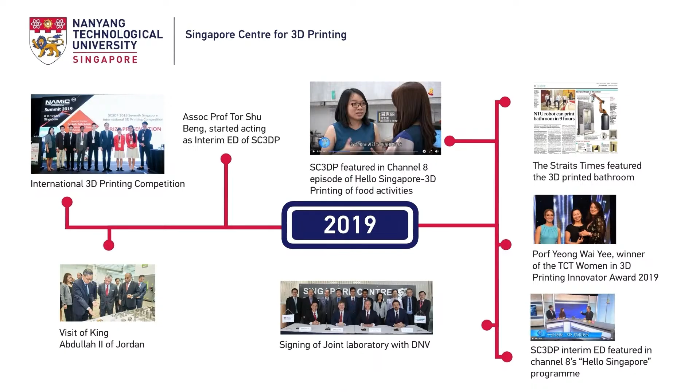...future of stakeholders to identify optimization opportunities and make informed decisions that prioritize sustainability and resource efficiency. From design for 3D printing to material development, new process development.

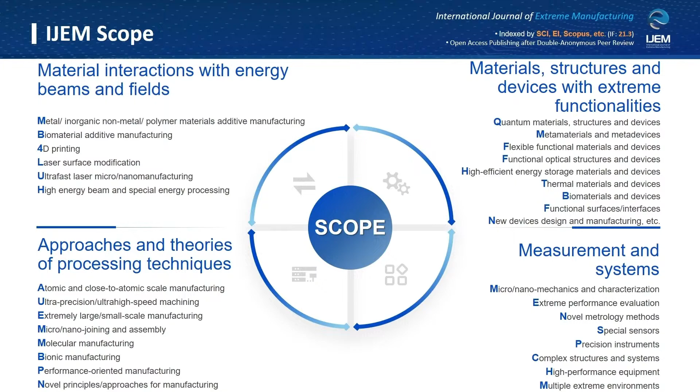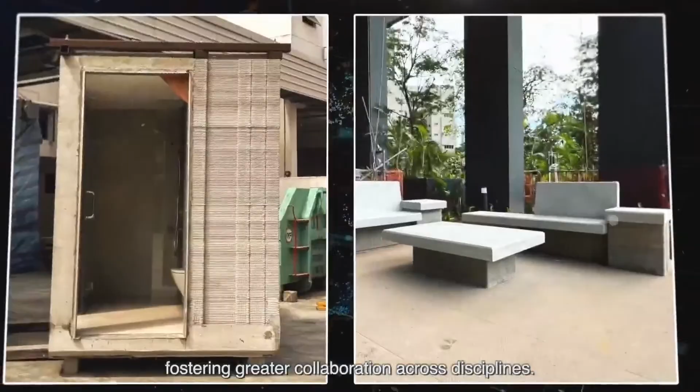Enhance precision, reduce timelines, enable complex design, fostering a greater collaboration across disciplines. And I'm very happy to moderate this first session focusing on multi-material additive manufacturing. And we have a line of fantastic speakers from United States, Australia, and China. And it's a great pleasure to introduce the first speaker, Professor Banerjee.

Professor Banerjee is a University Presidential Professor and Regents Professor in the Department of Materials Science and Engineering at University of North Texas in the United States. He holds several appointments as adjunct and visiting professor in Materials Science and Engineering at the Ohio State University, Nanyang Technological University in Singapore, Indian Institute of Technology, Bombay, and Monash University.

Professor Banerjee has over 350 publications in peer-reviewed journals and total citations exceeding 25,000. And today he's giving a talk entitled Additive Manufacturing of Compositionally and Functionally Graded Metallic Materials. Professor Banerjee.

Thank you very much, Paulo. So I'll start sharing my screen here. Okay, and go into the slideshow mode. I think everybody can see my screen, right? Yep. All right. Yeah, so thank you for the kind invitation, Paulo and you.

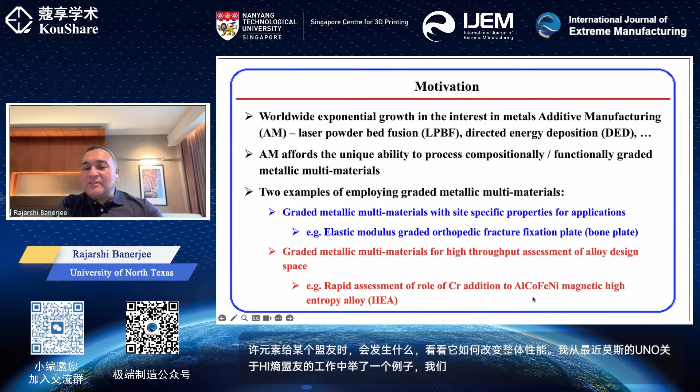And I've taken an example from more recent work on high entropy alloys that we do a lot of work on using additive manufacturing too. And this is a magnetic high entropy alloy, aluminum, cobalt, iron, and nickel, and the effect of chromium additions to it. So with that, let me just delve into these two topics.

So DED, I think most of you have heard of it. It's a blown powder process or directed energy deposition. We are not basically melting a bed of powders with a laser beam, but we are directly feeding the powders through a directed assembly system. So it goes through these powder hoppers. The powder hoppers deliver it through nozzles, as you can see here, and then the nozzles deliver the powders to the location where the laser beam is hitting a substrate. So you are effectively melting the powders that are kind of blown into the localized melt pool on the substrate.

And then you raster, you could have multiple systems. So the simplest one is rastering in the XY direction the substrate and the laser head along the Z axis. And that way you can build layer by layer. The feeding is usually coaxial of these powders. There are different technologies for powder feeding. I'm not getting into that.

Cooling rates are usually, I would say, in the range of 10 to the power 3. 10 to the power 5 is actually very difficult to achieve unless you have a very high conductivity substrate or cool water cooling or so on. But it is in the lower end of cooling, but still you might say rapid solidification type situation, but not as in laser powder bed fusion, where you can get up to 10 to the power 5, 6 quite easily, Kelvin per second.

A larger beam size allows you to go for printing of larger components, of course at the cost of surface finish, but you can also get faster build rates with this compared to laser powder bed fusion. And it's a very good technique for compositionally graded alloys. As you can see, these different powder feeders allow you to control the feed rates from individual feeders, and you can build different types of gradients.

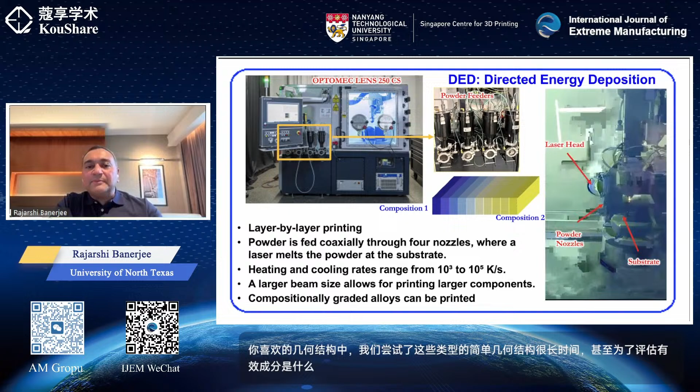Just to reiterate, if you build like digitized steps in a compositionally graded alloy using a DED type of process, you can then do a lot of things subsequently. You can actually heat treat them. You can do even mechanical working if you want on this material, like forging or rolling, depending on what your intention is, if you introduce thermomechanical processing into it.

You can do the measurements of composition along the gradient, microstructure. It allows you a lot of different things to do in a single small range of a build. But you can even get mechanical properties like microhardness and modulus and so on. And as I'll show you in the second part of my talk, an example of magnetic properties, looking at those as a function of composition.

Some of the initial work we did goes back to like early 2000s, as you will see, when I think this was the first set of DED processed metallic alloys that we started publishing on.

Work started in the late 90s, 98, 99, on the first LENS systems back at Ohio State when we were looking at it. So let's go into the two examples. The first one, as I say, was this graded metallic multimaterials with site-specific properties for a fracture fixation plate, which I'll explain to you in a minute. It's like a bone plate, and why that can be quite important in terms of achieving the required set of properties in a site-specific manner.

So just to give an example for those of you, the internal fracture fixation surgery is something that an orthopedic surgeon often does, tens of them even in a single day. This is a very common surgery. It's related to what you would call a kind of catastrophic fracture in a big bone of the body. Say, in this case, I'm showing you an example of the femur, which is basically this bone here.

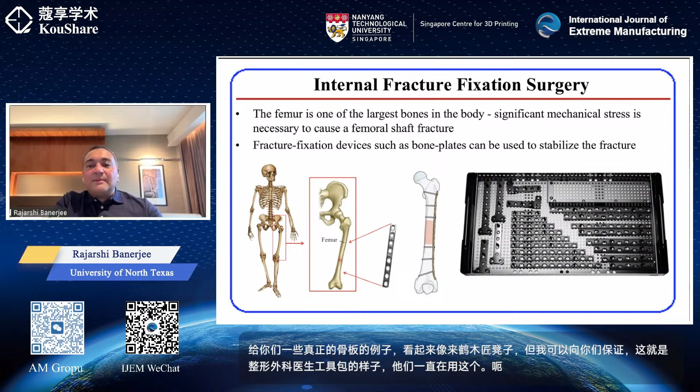This results in a modulus incompatibility that leads to an effect called stress shielding. This is a mechanics concept. I can go into it in more detail, but in the interest of time, I will just leave it for now. So what you want is a better compatibility between the metallic implant and the elastic modulus of the bone. So you need newer alloys.

Number two is the biocompatibility of these types of materials. Ti64, which is the most common one, over the years there have been some concerns over cytotoxicity due to aluminum and possibly long-term cytotoxicity from vanadium, and aluminum can have some long-term neurological effects, including Alzheimer's. These are not very well established, and Ti64 is still used very widely, but there may be better options using more BCC stabilizing or beta stabilizing elements like niobium, zirconium, tantalum, molybdenum, which have also been shown to have better biocompatibility.

And then again, there is inadequate wear resistance and so on that we have to worry about. So this is on the material side. But there's a challenge in terms of the design of a fracture fixation plate also. If you think of this fracture fixation plate, which you see here, one of the things you will notice is that if it's got a constant modulus all the way through, then in the region of the fracture, you are effectively nicely shielding.

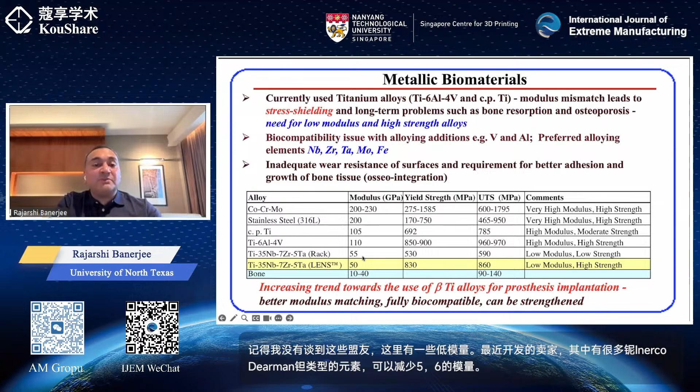So if you use one of those alloys and put that towards the edges, which is the low modulus, we grade the modulus with composition. So this is the composition gradient across this build. The build is relatively tall. This is made by LENS or DED process, about 55 millimeters tall, so more than 2 inches. And you can see that it is a 13 millimeter by 30 millimeter cross section. So actually this is the initial build, and then we machined it. But you can see the composition steps are given here.

So in the center you have CP titanium, which is the high modulus titanium alloy. For titanium you have a high modulus of like 110 GPa. But on the other side, as you go further, you would expect the modulus to go down because of this alloying with other elements. So based on that, you can look at the X-ray diffraction from each of the layers. Here we decided to do 5 macroscopic layers. They're very thick. In a real design, you would like to make them much thinner, but this was just a proof of concept, as I said.

And you can see the distinct differences in the phases present. Again, I'll just quickly go through them. So you had some beta plus alpha, plus this BCC niobium was unmelted niobium powder; this is what gave rise to these peaks. And they happen to occur where you had the highest niobium, so there's no surprise there. But bottom line, you got the BCC phase, some alpha phase coming in, and the fraction of alpha phase, which is the HCP phase, increases as you go to CP titanium. CP titanium, by the way, is going to be 100% alpha because there is no BCC stabilizing element in it.

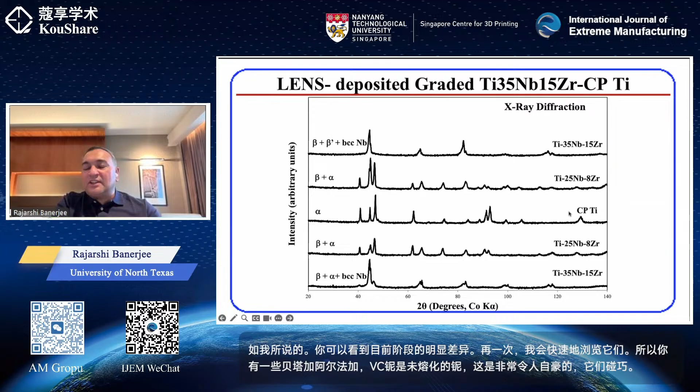But the corresponding change in modulus we measured with 2 independent techniques. This is from the ultrasonic measurements. At the edges, the modulus is going down to the range of 75, about 72, 73 to 80 using ultrasonic. If you look at it from instrumented indentation, it's pretty similar, 70 GPa, whereas at the center the values are as high as 110, 115 GPa. And this is nicely grading on both sides. It's a symmetrical gradient, as you would want for an actual fracture fixation plate, with the central region shielding the fracture site, but the edges having lower modulus. So this worked as we designed it.

In terms of the hardness gradient, it was not as much, which is fine because the mechanical strength of all these alloys is reasonably high for the purposes that we need. So it should be fine. The hardnesses were lying in the range of about 250, 270 to 350, which is fine for the application intended.

So this is the summary, and on the side here, I wanted to show you that this original build was then further machined. So we showed the proof of concept that we were able to drill these holes into these layers, maintain the mechanical integrity, and it was also mechanically finished or polished to look exactly like a fracture fixation plate would, with this modulus gradient. So this is one example of how you use a compositionally graded alloy with a site-specific change in property. In this case, the elastic modulus is what we were grading to get this nice graded fracture fixation plate, which potentially could be used in actual surgeries.

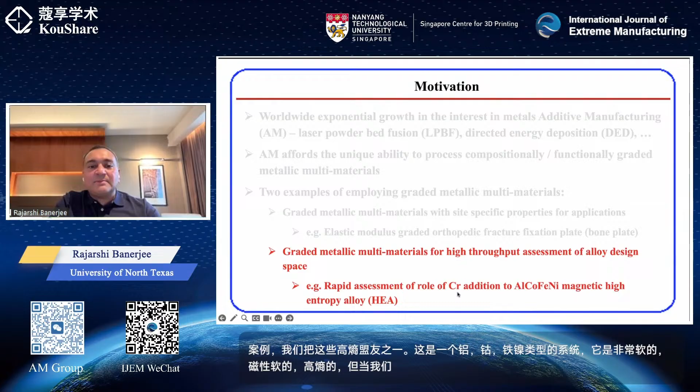So to give you a little bit of an introduction, in the interest of those of you who may not be aware of the system, this is a common type of high entropy alloy, similar to a lot of these 3D transition element based high entropy alloys. But what we were looking at specifically is, can we design something where I can tune the magnetic properties and the mechanical properties at the same time? To do that, we are using this approach of graded alloys to screen, or see systematically what happens with a change in composition.

Now, why select this composition? Well, cobalt, iron and nickel are three of the strongest ferromagnets in the periodic table. So CoFeNi is a very good ferromagnetic system. Addition of aluminum promotes BCC phase formation and actually makes a B2 ordered phase. So this B2 ordered soft magnetic phase is the starting point. It has good properties from a magnetism point of view. However, we are trying to see if we can tailor the magnetic properties and the mechanical properties by adding chromium.

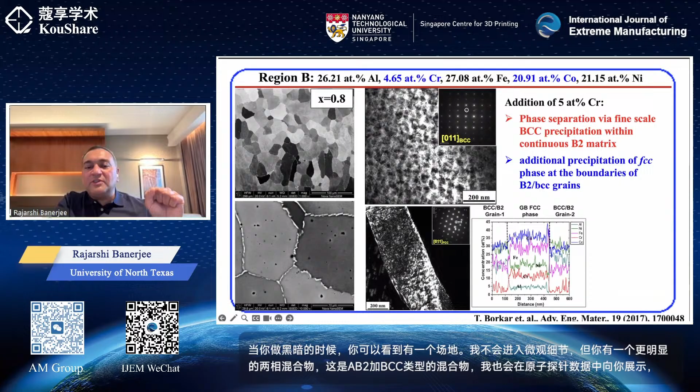You have BCC precipitates that are forming within a B2 matrix. All the compositional details are given here. Again, I'm not trying to just focus on the microstructure, but this has some significant impact on the magnetic properties, which I'll get to in a minute. But what we are seeing here is that you have fine-scale BCC precipitates that are rich in iron and chromium, in a matrix of nickel, aluminum, cobalt, which is the ordered B2 phase.

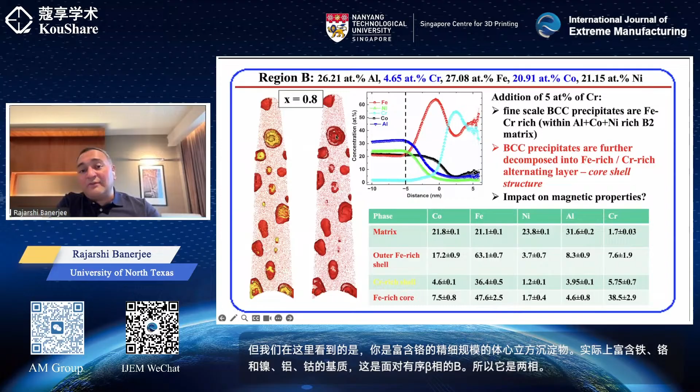So it's a two-phase mixture. And these discrete precipitates are forming due to the addition of the chromium, is the point I wanted to highlight. And you can see that very clearly. They also have a core shell structure and so on. Very interesting microstructure, not just from a structure point of view, but also magnetism. And I'll get to the magnetism in a minute.

So now I'm going to the case when I add more chromium. So now we are having, if not equal chromium and cobalt, almost there, 15% chromium, about 12-13% cobalt. This microstructure is completely different now. You have what we would call a spinodally decomposed microstructure, because these images show you a two-dimensional section through a three-dimensional co-continuous mixture of nickel aluminum cobalt rich regions and iron chromium rich regions. This is a classic spinodally decomposed microstructure. So that again has changed.

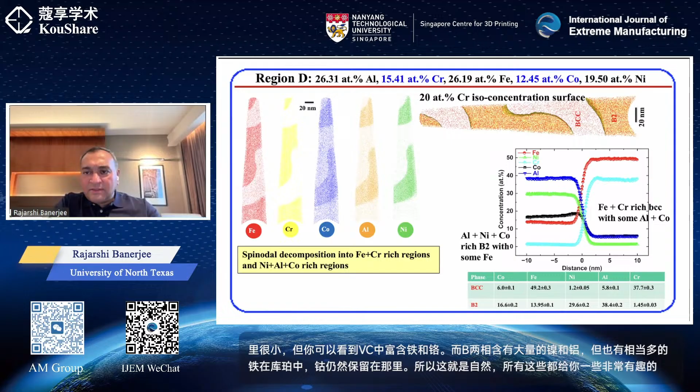And this goes back to the idea that as you're increasing the chromium content, you increase the tendency for phase separation. The system no longer wants to be a single B2 or BCC phase. It wants to split up into two phases. The atom probe data again is very clear on this. It's a little small here, but you can see that BCC is heavily enriched in iron and chromium, whereas the B2 phase has a significant amount of nickel and aluminum, but also quite a bit of iron and cobalt is still retained in there. And all this gives you some very interesting insights into how the phase decomposition behavior takes place, all within, in this case, a 1-inch size block of material made with the DED process.

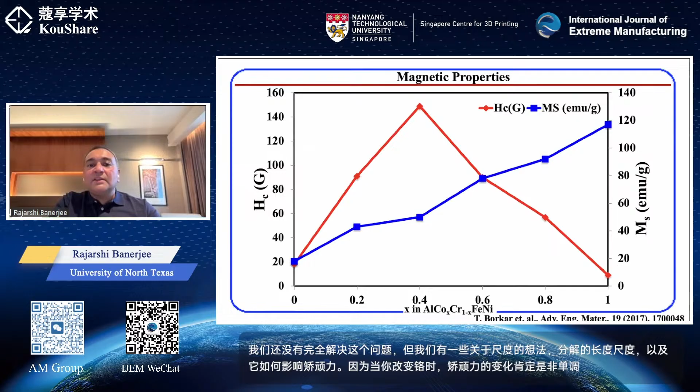We still haven't fully resolved this, but we have some ideas about the length scale of the decomposition, and how that could be influencing the coercivity, because the change in coercivity is definitely non-monotonic as you change the chromium content or replace more cobalt with chromium. So this is just a summary of what I told you.

This is the part that is very interesting and came out of this high throughput combinatorial assessment using a compositionally graded alloy made with DED. So the summary of this second part is, again, the DED process was used for making a graded HEA. And why? Because we were trying to look at the interplay of the compositional change with chromium addition to cobalt in the high entropy alloy with the magnetic properties.

So very early stages of phase separation were observed in the AlCoFeNi case, but magnetism-wise, it was really nice because of very low coercivity and high saturation magnetization. But as we add increasing chromium, the saturation magnetization came down, but the coercivity had a different behavior, and these are the reasons for it. When you add chromium, you first form these BCC precipitates, which are iron-chromium-rich, and that will reduce the saturation magnetization but increase the coercivity, because you are introducing these precipitates which can be barriers to magnetic domain wall motion.

And eventually, though, increasing chromium pushes it into more and more of a phase-separated, spinodally decomposed microstructure, and it becomes coarser. As it becomes coarser, you're reaching a point where the spinodally decomposed microstructure is not as much of a barrier, because the magnetic domain walls can move within each of the B2 and BCC phases and again become softer in behavior, which is what the lower coercivity appears to show.

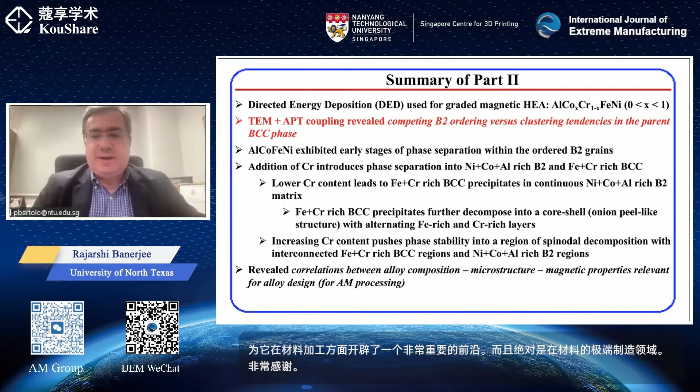Yeah, we have the first one. Yes, I can read it in the chat box. That's the one, right? Okay. Paulo? Yes. Yeah. So, okay, the stress shielding.

So, in terms of stress shielding, if I understand your question, are you talking about the management as in the reduced modulus, or what stress shielding is? Either way, I just want to clarify the question. Should I explain the stress shielding angle a bit better? I believe that the question is considering the aspect of the equivalent elastic modulus, to avoid the problem. Right. Yeah, let me see. I can quickly go back to that slide. Let me just keep it in this mode to be faster.

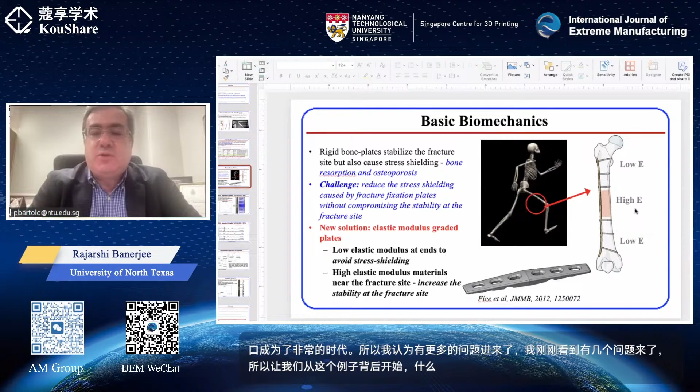Beyond the two examples, what other material systems or industrial applications do you see as most promising for LENS-fabricated compositionally graded metals, and what barriers might hinder their adoption? Right. So the points already mentioned in the question are definitely big ones: cost and scalability are two of the barriers. And as I was just mentioning to you, Paulo, in graded materials the interfaces are very critical. So how are we designing the interfaces?

What is the length scale over which a gradient? Supposing I have got change from composition A to B, how close do A and B need to be so that my material works well? Take a simple example. We designed this fracture fixation plate.

We have not really put it into use, but one thing we have not done at all is, for example, fatigue loading. In a real biomedical system, you will need to look at the fatigue behavior, and fatigue can be very challenging when you have different moduli in different regions of the same implant. So can we design that better?

Those are the types of things that will come up, so it's very promising, but I still think there's a long way to go in terms of actually applying them in an industrially acceptable manner. That's very important, I think so.

You highlighted the coupling of compositional gradation with unconventional additive manufacturing thermokinetics as a complicating factor. Are there specific strategies to mitigate this complexity and improve microstructural control? Yes, so there are two things that we found.

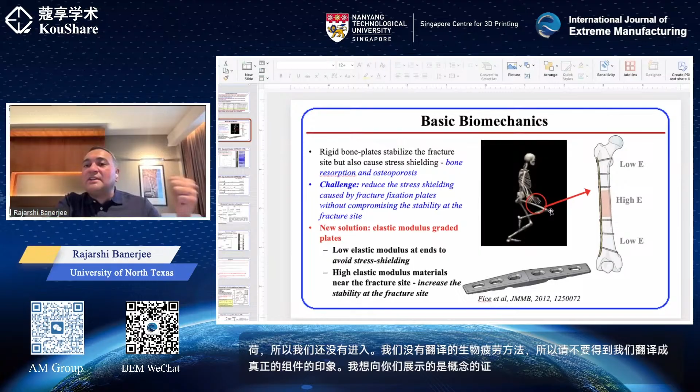But I think with sufficient design criteria being fulfilled and a more subtle, not the kind of example I'm showing you here, this is just what I would call a too abrupt change. You want a much more subtle variation in the modulus, which can be done. This is just a proof of concept. You should be able to get to more smooth fatigue behavior across the layers. So that's my answer.

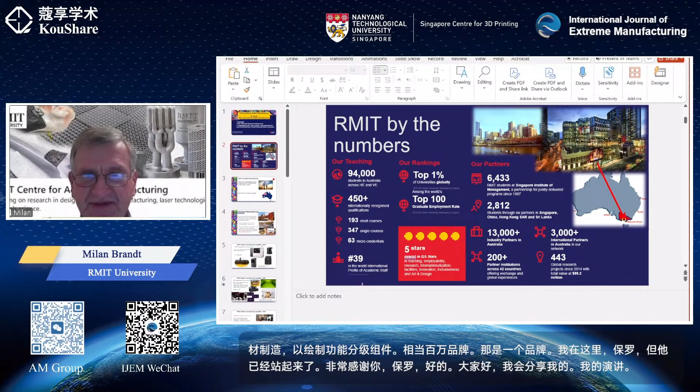I wanted to basically tell the audience a little bit about our advanced manufacturing precinct and the Center for Additive Manufacturing, and some of the work that we are doing in this area. And then we'll have one of our PhD students who's in his final year, José Lozares, give a presentation on his PhD topic involving laser powder bed fusion.

For those not familiar with RMIT, it's based in Victoria, in Melbourne. Melbourne is a large city, 5.5 million people. It's a modern city. RMIT itself is an old institution by Australian standards. It's 124 years old, and it has always been in manufacturing. And we are also a dual sector university, so we have both higher education and vocational education. And we currently have something like 100,000 students in Melbourne. We also have campuses in Vietnam and Singapore.

In terms of our additive manufacturing journey, we really started in 2010. We were one of the first universities to get into additive manufacturing because of globalization that was taking place. A lot of our industry and manufacturing was going offshore, and the university wanted to stay in manufacturing, and they basically decided to work in additive manufacturing as this was rising globally. In 2020, things are sort of changing after COVID. So the driver for additive manufacturing, not just at RMIT, but other universities and companies, is sovereign capability, which is really offered by additive manufacturing.

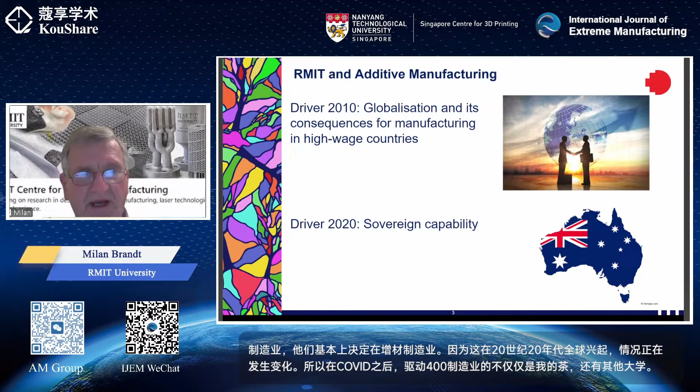So the university set up this advanced manufacturing precinct in 2010. It's a $30 million research and teaching facility. It's unique in Australia. It covers both metal and polymer-based technologies together with high-end CNC machines.

So we are sort of promoting ourselves as a one-stop shop for industry in terms of research capability. And these are some of our equipment. So we've got a range of polymer systems, large FDM machines. We've got Markforged FX10 printers. For our teaching, we use Bambu printers, so 30 plus printers. And then there's a PolyJet J750 and an SLA machine.

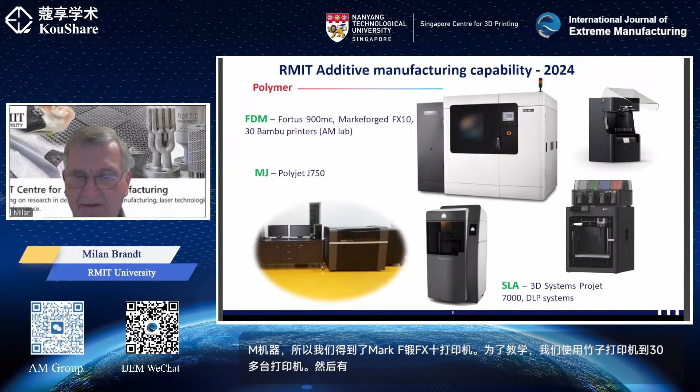In terms of our metal machines, we've got 5 powder bed systems. The largest one is SLM Solutions 500. It's a quad system. We also have an Aconity MIDI Plus we've been working with for the last year and a half. And that's a very fancy research machine. If you're not aware of it, it comes with nLight laser, and you can vary the beam profiles. It comes with a whole heap of sensors.

So we are also looking at AI. Basically, we extract a lot of data and look at process monitoring, process control. We've got a large Trumpf system on bottom right of the slide with a range of thermal sensors, and that's where we do a lot of our multi-material research. And on the left-hand side of the slide, we've got a WAAM machine for really high metal deposition. And we're also looking at some projects involving multi-material with a WAAM system.

This is all supported by high-end CNC machining centers, scanners, and all the usual things that come together with additive manufacturing. We also have a concrete facility. It's not based within AMP, it's another part of the university. There's quite a bit of work going on in this area in terms of new materials for printing houses and other sort of civil structures.

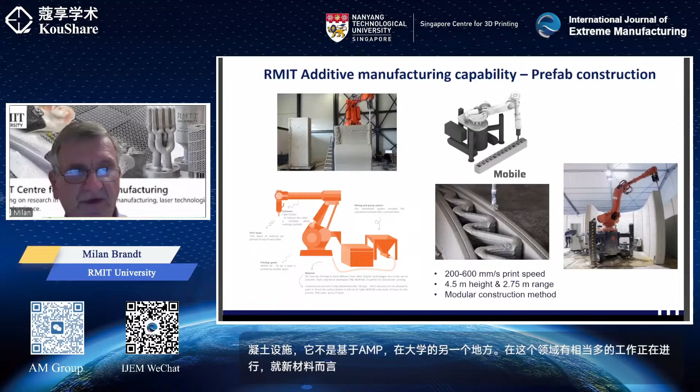In terms of the centre, we're fairly large. There's something like 17 academic members. We usually get something like 4 visiting professors on a regular basis, 16 full-time researchers, and sort of 30 plus PhD students. And we've graduated over 100 PhD students since 2010. Our budget, our income, I should say, is about 5 million. This is research income per year. And we certainly publish over 100 publications per year in high-impact journals.

The areas we're focusing on at the moment is sustainability, application and materials development, so machine learning and AI, technology and process development, and surface technologies and post-processing. And as I mentioned, we publish in high-impact journals, so we've had 4 Nature papers in the last four years.

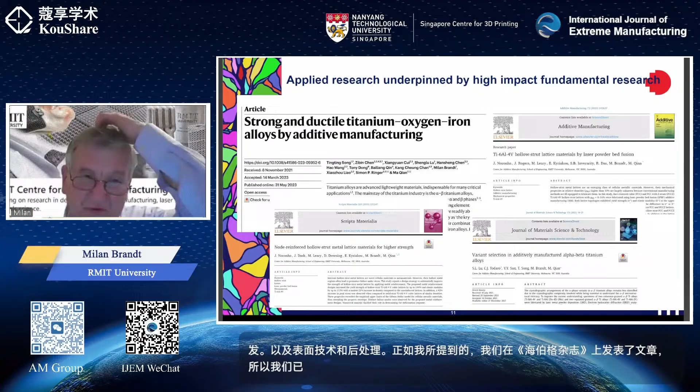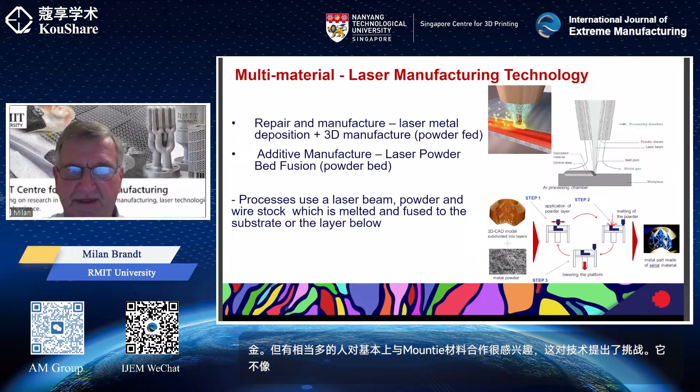So most of the work in this area up to recently has been done with single alloys, but there's quite a bit of interest in basically working with multi-materials. The challenge there is the technology. It's not as simple as the DED technology in terms of multi-material processing. In terms of DED, Professor Banerjee has published a review article a couple of years ago, and it basically shows you the range of materials and the multi-materials that have been published over the years, and you're really talking about 25, 30 years. So this technology has been around for quite a while.

One of the challenges, I guess, that Professor Banerjee didn't mention, is the certification. So if you're talking about aerospace components and even medical implants, it's a certification of this graded structure. So that's certainly one of the challenges that's been faced by industry as opposed to monolithic materials. Oops. So these are some of the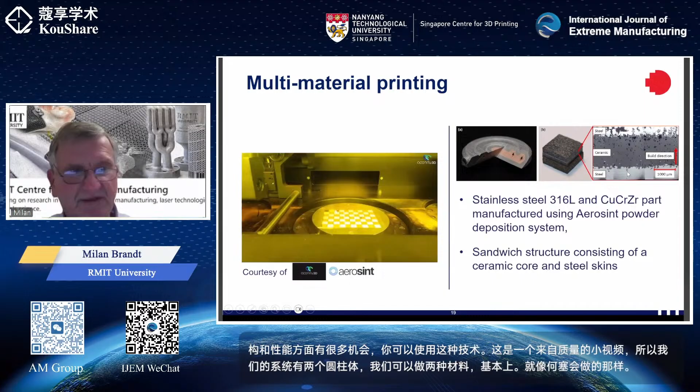So I think on that note, I'll hand over to Jose. Thank you very much, Paolo. I don't know if there's any questions, happy to answer, or... I think that we'll have the questions at the end, Milan. Jose, please. Can you see all my screen? Yes. Perfect. So, well, thank you very much, Milan, for the sweet introduction.

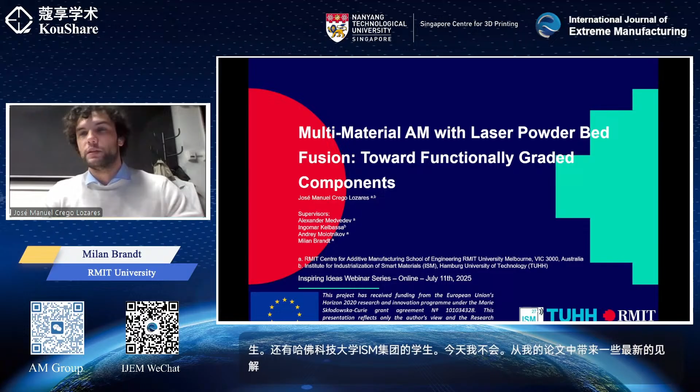So I'm Jose. I'm a doctoral student at RMIT University, but also at Hamburg University of Technology at ISM Group. And today I will bring some of the latest results and insights from my thesis, my talk on multi-material AM with laser powder bed fusion toward functionally graded components. So here's a brief overview of the contents that I will cover during the presentation, which opens with a quick introduction and motivation section, a brief explanation of what is multi-material PBF, mostly the benefits. I will go over the challenges and the current status of the technology, and then I will introduce some of my recent work.

So let's go for the motivation a little bit. If you think of one of the biggest marvels in engineering, you might think about the Starship rockets from SpaceX, right? So space and the space industry are playing fields that could answer many research questions from many disciplines, but we cannot get there the way we do now. We need to be more efficient, make better use of our resources, and all that without skyrocketing the bill, which is already around 90 million per rocket, according to the latest report, I believe. So I asked myself the question, how can we make this thing cheaper?

Well, if we look at the metal components manufactured through additive manufacturing in this rocket, we can find the combustion chamber, which is inside one of these 33 cone-shaped parts at the bottom of the rocket. So combustion chambers are one representative component from this space launcher market that receives this level of attention because of the need for high cost effectiveness. In summary, this chamber is in charge of providing a volume for combustion and converting the thermal energy into kinetic energy. For liquid rocket engines, temperature control of the thrust chamber or the combustion chamber is fundamental to secure the correct operation of the engine.

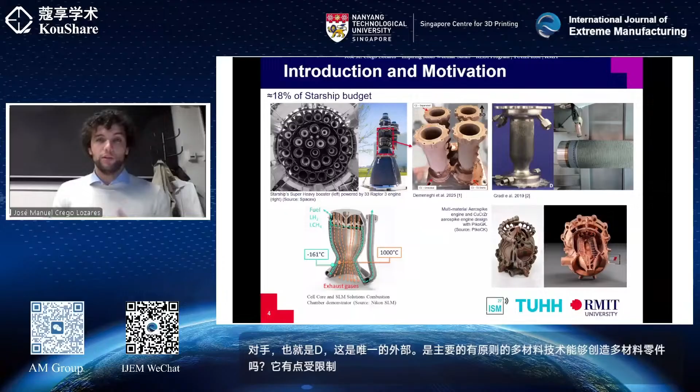So these advances shed light onto the game-changing potential for the development of finer, more intricate multi-material regions, as a direct AM competitor, which is DED, which is, I would say, the main multi-material technology able to create multi-material parts, is a bit restricted on the resolution that we can achieve because of the nature of the process.

So what is multi-material PBF? Multi-material PBF is just a small branch, so far, it could get bigger. A new branch of the well-renowned powder bed fusion process with a small update: it allows for deposition within the same layer. This allows us, as I said, to have transitions of materials not only in the building direction, but also within the same layer.

Among the main benefits from multi-material, we've already listed the unification of material, feedstock size, overall lead time reduction, one thermal history, fewer production steps, tailored properties, reduction of total parts. These we are all very familiar with, but if you go for PBF, you can also benefit from better mechanical properties, a higher cooling rate, a smaller melt pool size that you can control, high-end resolution, and less post-processing, because we are not going to get rid of it in any of the AM technologies, but definitely less.

So researchers on multi-material worldwide can benefit from the previous assets and can generate new lines of research. Briefly, I will mention some of the insights that we got from APICAM last week. Some of them were improved performance with functional regions, which you can find in the example I just described with the combustion chamber, metamaterials, for example with auxetic properties that we saw last week, and also property tailoring and microstructure control.

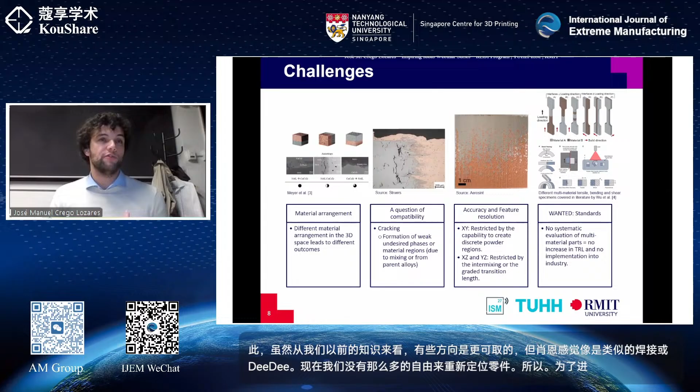So if the technology is looking so nice, why is it not taking off? Well, some of the technical challenges can be classified in the categories that I've described in this slide. The first one is that material arrangement now matters. While some orientations are preferable from our previous knowledge in fields like dissimilar welding or DED graded materials, now we don't have that much freedom to reorientate the parts to make these transitions, and therefore new optimization routes need to be found for each arrangement of material to considerably reduce the intermixing region.

However, this is not a magic laser still, and if we don't run a correct optimization, it might lead to defects at the interface that can be caused by many factors, among them the formation of new phases or weak regions.

While this solution can be incorporated in some of the multi-material systems that are currently available, no previous analysis on the influence of laser beam shaping on multi-material single tracks has been explored, which is crucial to understand the complex interactions taking place at the interface. Moreover, understanding how these thin interfaces are formed is key if we want to move on to bigger, more complex and intricate multi-material parts.

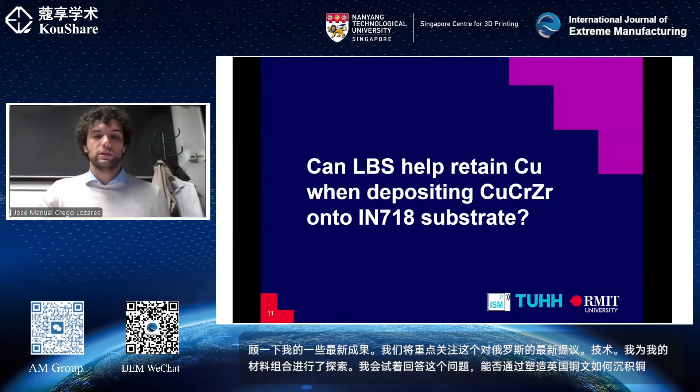So after this introduction, I will go over some of my latest results. We will focus on this latest proposed technology, which I explored for my combination of materials. And I will try to answer the question: can laser beam shaping help retain copper when depositing copper-chromium-zirconium onto an Inconel 718 substrate? So for this study, we produced single tracks, which is a very well known and established method for determining the quality of the deposition.

And we varied the scan speed and the laser power for 3 different laser modes at a fixed layer thickness of 60 microns that we determined in a previous study was the optimum for retaining the maximum amount of copper. After 60 microns, we don't experience a huge retention in the amount of copper that we can deposit. We also fall into discontinuous regimes quite easily.

So the single tracks were manufactured with the system that we have here at RMIT, which is equipped with an nLIGHT laser, a very fancy laser that can do the following. We have access to the traditional, most standard laser source, which is a Gaussian laser that we see as mode 0 over here. But on top of that, we have the laser beam shaping technology that allows us to redistribute the energy density between the core and the ring, up to 6 stages.

So we will compare mode 6, mode 3, and mode 0, which we determine as almost full ring, some intermediate state, and full Gaussian. And we will see how they deal with the retention of copper, as well as the possible defects that we can encounter.

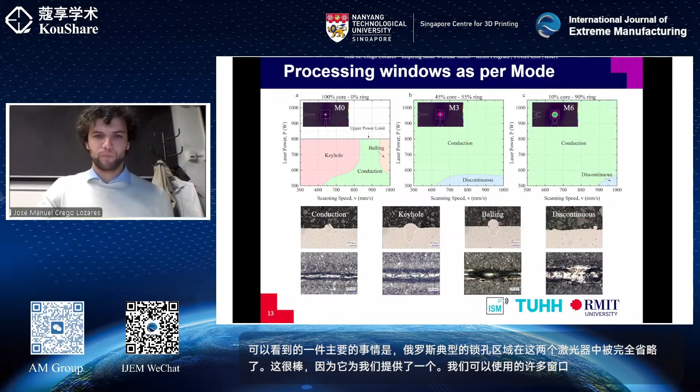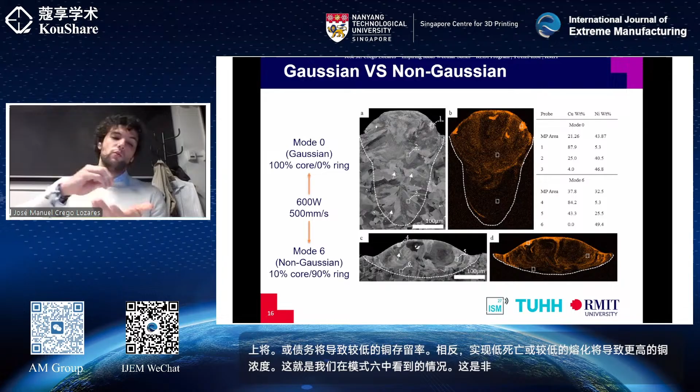This is key because this is just single tracks, but when we do multiple single tracks together and then the next layer on top, the fact that we are remelting a very little amount of the substrate will secure us that the transition is actually very fast. So we can take control of how big or small we can make this intermixing region.

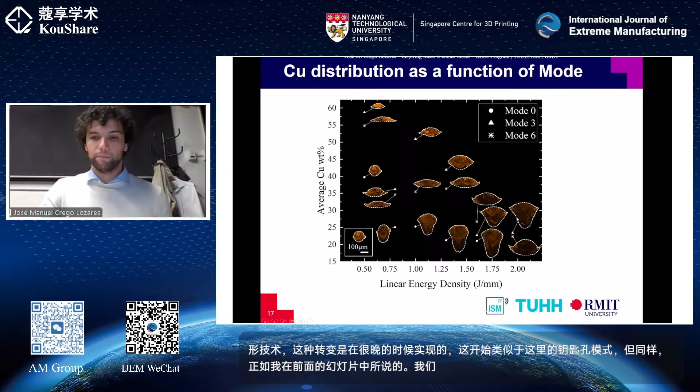So can LBS help retain copper when depositing copper chromium zirconium onto Inconel 718 substrate? Well, the answer is yes, it is. But before wrapping it up, can we say anything about the cracking? How did LBS address this matter? Can we avoid it? Well, the answer is yes. No macro cracking was found. However, intergranular cracking was found at the heat affected zone.

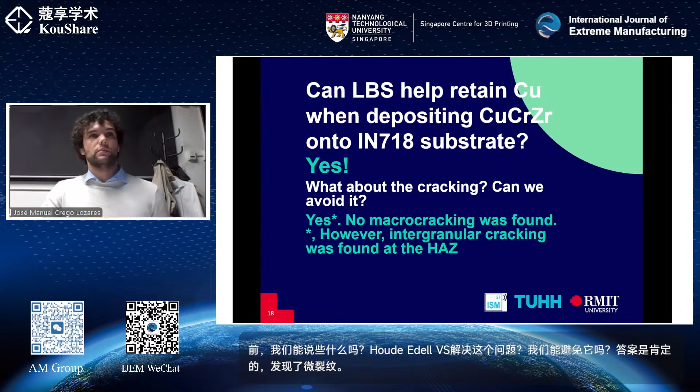So very briefly, because I haven't included too much detail on this, since I didn't know what the audience was, and I didn't want to stress this too much. I will just mention that we explored 3 cross sections for each configuration that we created, and we found intergranular cracking in the higher energy configurations for mode 0 and mode 3. However, mode 6 presented no cracks at all, which is great news.

Nevertheless, this story is not over, because when we build bulk multi-material parts, we will introduce new problems, and therefore there is still work ahead. So for future work, I just want to very quickly go over some of the short-term goals that we're having, and this is translating the findings from this study that we're running on the single tracks onto controlling the interface at bulk multi-material samples. Also, we are planning to explore the solutions for other crack-free 3D arrangements.

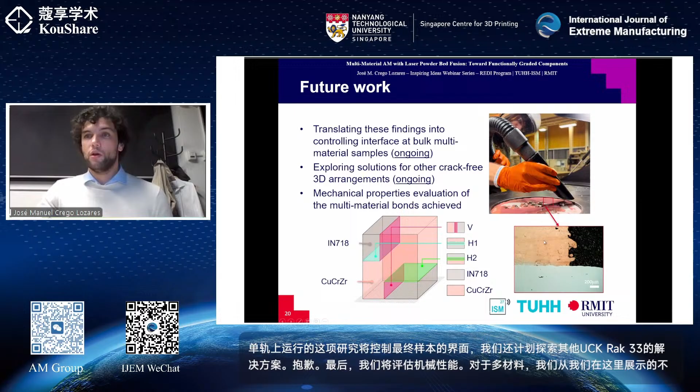And lastly, we will evaluate the mechanical properties for the multi-material bonds that we are achieving from the different bonds that we show here in the schematic. And these are some of the latest results that we've obtained, just for you to have a very quick sneak peek.

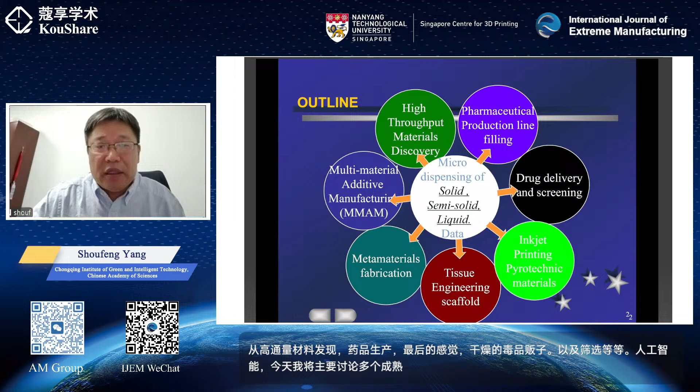My research area is mainly focused on micromaterial dispensing technology and using it for a few different areas like high throughput materials discovery, pharmaceutical production line filling, drug delivery and screening, and so on. Today I'm going to mainly talk about multi-materials additive manufacturing. Right, I'm going to skip this because everybody knows what 3D printing is.

And if you look at the classification of additive manufacturing, I'm more interested in this one, using raw materials, say either powder-based, solid-based, liquid-based or gas-based. So you see that most of the important ones are mainly powder-based, especially powder bed-based additive manufacturing. One of the questions I've always been asked is why we are doing multi-materials additive manufacturing. One question is how many materials we are using in our modern products.

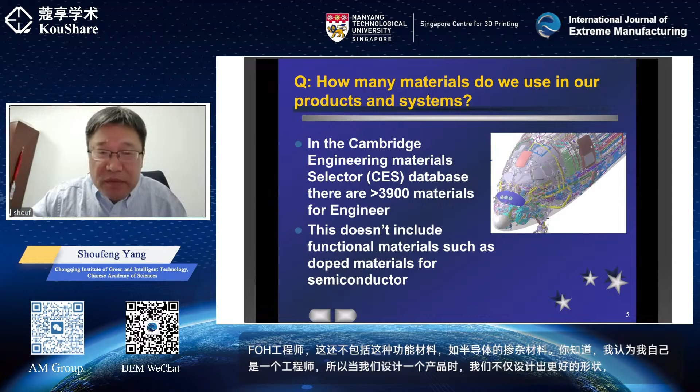There's no exact answer, but in the Cambridge Engineering Materials Selector, which is a very good database, there are about 4,000 materials for engineers. And this doesn't include functional materials such as doped materials for semiconductors. I think of myself as an engineer. So when we design a product, we not only design the shape, but also need to select the right materials. But how to select the right materials? Why are we using so many materials? Simply because single materials couldn't provide the multiple and complex functions that are required. And we always need compromise, joining and assembly.

For example, we need copper for high thermal conductivity, aluminum, titanium and fiber composites for lightweight, steel for anti-corrosion, and so on. That's why we have to select so many different materials. And there's an argument that there's no perfect material. Sure, a lot of material scientists are trying to improve material properties. But always, when you improve one performance, you sacrifice or compromise another property. For example, if you increase the hardness of materials, typically you lose toughness.

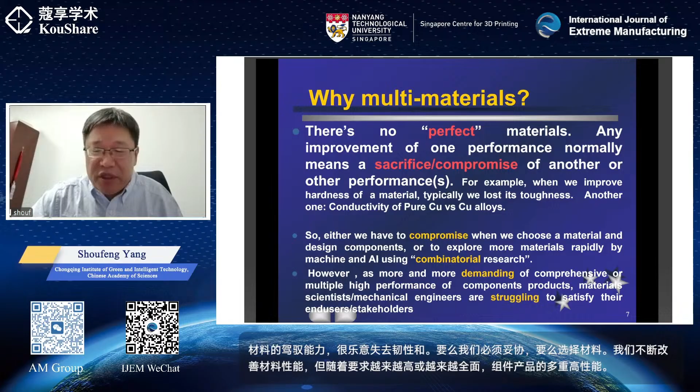And either we have to compromise or choose materials, and we keep improving the material properties. But as demands for multiple high performance in components and products become more and more comprehensive, material scientists and mechanical engineers are struggling to satisfy their customers or stakeholders. And sure, there are a lot of questions about why we need to build multi-material components. I'll give you a few examples.

For example, plastic molds and die casting tools. These tools are quite expensive, and we want them to last forever. But we have to compromise a lot of properties. Especially the thermal conductivity is normally not very good.

We have to wait for long cooling time, and the surface hardness is not ideal, so sometimes it wears out. If we can use different materials for different parts, like the conformal cooling channels, and use harder materials for the surface, sure, we can improve the life of this mold. And if you look at a turbine engine, there are so many different temperatures inside and so many different materials everywhere.

Sure, with 3D printing we can put a lot of components together, especially like the figure underneath. A German company, I think it's SLM Solutions or Concept Laser, has successfully built more than 300 parts in one go in this engine or the mainframe. But only one material. If you look at all of these components, you realize that they are actually different materials. So you can build this structure, but it won't function.

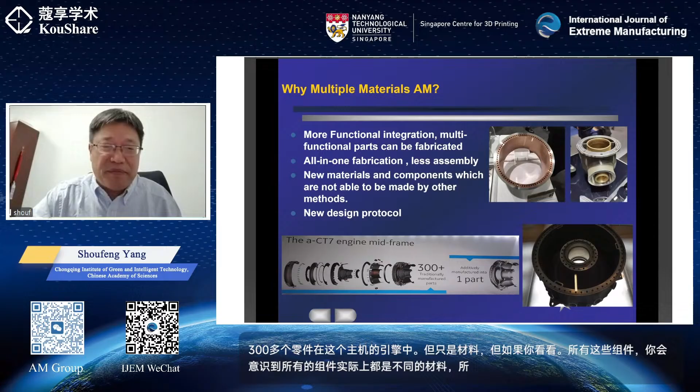That is a challenge. Like Rajarshi mentioned earlier, there are bioimplant applications; I won't mention that again. And there are also some ideal or impossible materials, like non-positive thermal expansion coefficient materials. Professor Sigmund designed these materials more than 30 years ago, and nobody can achieve that. We know that every material has a positive thermal expansion coefficient. This is very bad if you need high precision machines. The temperature will change the dimension of the structure.

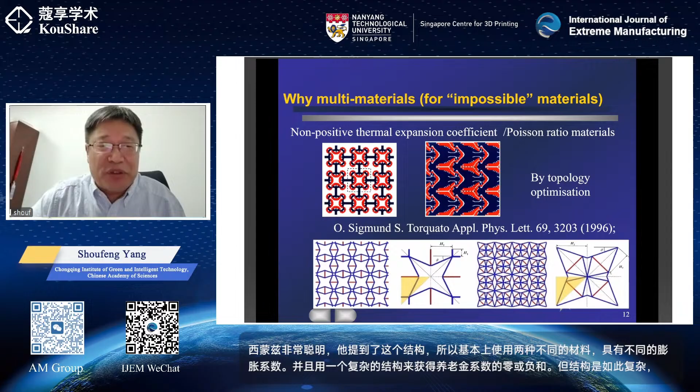Ideally, if you can have some materials with a negative thermal expansion coefficient, that can compensate this dimension change. Sigmund is very clever. He proposed this structure: basically, you use two different materials with different thermal expansion coefficients and a complex structure to get zero or negative thermal expansion coefficient. But the structure is so complex, a very three-dimensional multi-material structure, difficult to achieve. And a very hot topic, metamaterials as well. If you look at the structures, they're always using quite different materials.

When I got involved in this area more than 25 years ago, my supervisor was Professor Julian Evans. He invented a technology called direct inkjet printing, which is quite different from binder jetting. He printed materials directly from the inkjet printing nozzles. Basically, he sacrificed his desktop inkjet printer, which was quite expensive 30 years ago, and reloaded the inkjet cartridge with different ceramic inks. He built this functional gradient structure about 30 years ago, successfully changing the composition continuously from zirconia to alumina.

Then he got a pretty big EPSRC grant to do functionally graded materials with metals, with powder bed based additive manufacturing. He thought, I printed ceramics already using direct inkjet printing, why can't we change to metal inks? But when I started this project, we realized that was impossible, because in a powder bed based technology the powder bed is so hot. We use a high power laser to melt the powders, reaching thousands of degrees. If you print any inks with solvents on it, you can imagine it's like spraying something on your hot pans. So we had to think about how to print with dry powders, just dry powders.

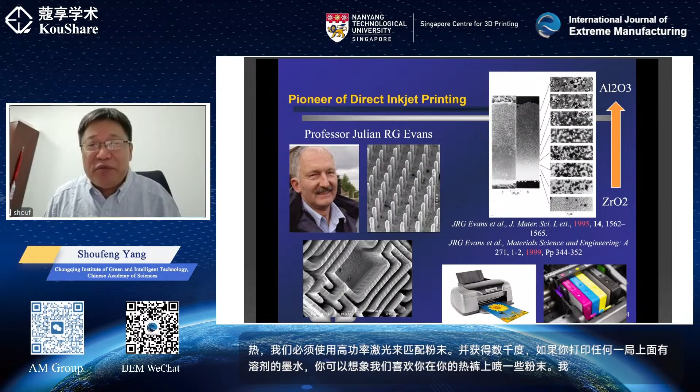Very luckily, but actually unfortunately, it has happened more than 20 years later. XJet has commercialized this technology using direct inkjet printing. They print ceramics and metals directly, and more interestingly, print multi-metals together. The technology is fantastic, with such high resolution, and you can imagine that a real breakthrough technology takes a very long time to be accepted or commercialized. From the start of the idea, it took about 20 years.

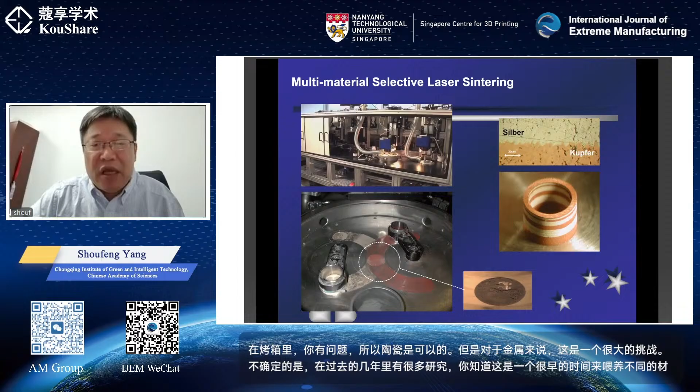But if you print metals with this technology, you have to put them in an oven. When the metals have different melting points, you have a problem. So it's okay with ceramics, but with metals it's a big challenge. I'm sure there's been a lot of research in the last couple of years. This quite early work used different powder feeding tanks to feed different materials. You can see they can only change materials between layers, not inside layers.

Also, Fraunhofer developed this technology by modifying a single material technology with a suction unit and refilling. They print a very beautiful multi-material structure. But if you look at the powder on the brush, you see the problem. All of the powders are mixed. Sure, they have thought about a lot of ways to separate them, using different sieves, magnetic properties, or different density.

But I don't think that is feasible, because you are talking about billions of particles. For some critical applications, for example in aerospace, you won't allow any contamination in those mixed powders. And especially when the build volumes are getting bigger and bigger, you talk about meter-size powder beds. There's tons of powder inside, and it's so expensive. You are talking about hundreds of thousands of pounds of powder in a tank. So how to avoid this cross-contamination?

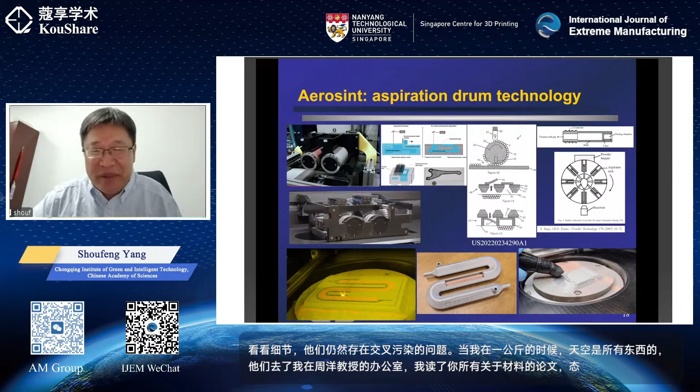And Professor Milan also mentioned the Aerosint technology, and it's a lovely piece of work on the market now. But if you look at the details, they still have a problem of cross-contamination. When I was in KU Leuven, a guy from Aerosint came to my office and said, Professor Shoufeng Yang, I read all of your papers about multi-materials additive manufacturing. We got a lot of inspiration from that. So very good luck, they have done so well.

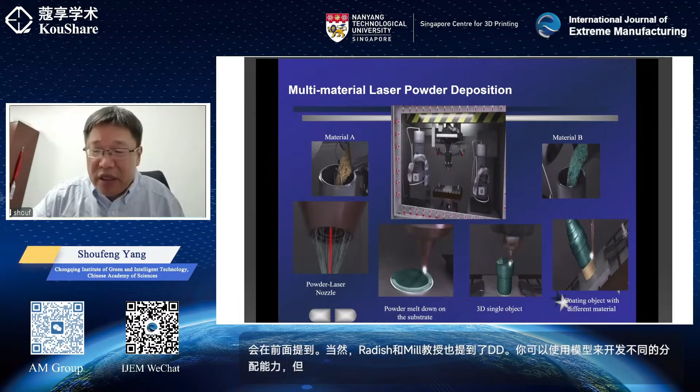And also Professor Lin Li from Manchester uses some suction and redispensing technology to build multi-materials using some technology I developed, which I mentioned earlier. And sure, Professor Rajarshi and Milan also mentioned DED, where you can use multi-nozzles to dispense different powders, but we are struggling with the resolution or high definition of the structures. There are a lot of different ways of thinking about how to do powder bed-based multi-materials, even Xerox methods. I reviewed all of these different ways more than 15 years ago, and it's very challenging.

So why hasn't additive manufacturing evolved into multi-materials additive manufacturing? If you look at the principle of powder bed-based additive manufacturing, you see the problem: they use a roller or scraper to spread the materials layer by layer, so you can't change the composition inside a layer. So the major challenge in multi-materials additive manufacturing is how to deal with the powder bed. This is the first challenge. There are a lot of materials challenges as well, an area we are also working on, especially my students and colleagues working on interface problems.

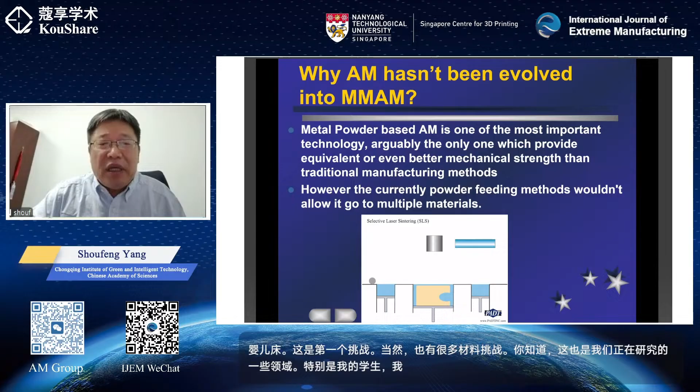When I started with multi-materials dry powder dispensing, I got stuck actually. I reviewed all the different ways to do that. I even looked at the whole history of 2D printing, thinking, can we get some inspiration from the history? Because the first 3D printer came from stereolithography, what we call 3D lithography. And many 2D printing technologies, which were about publishing, not material processing, have evolved into 3D printing, but not all. Unfortunately, we couldn't find any clue from the history.

If you think about what multi-materials is, compared with 2D printing or publishing technology, it's kind of like monocolor printing versus color printing. You can use just three different colors to get so many different colors. So basically, you can use a few different materials to get so many different materials. That is our idea.

At that moment, luckily, I found that the ancients had given some ideas on that. I'm not sure if you have visited Tibet, but this artwork from Tibetan monks is called Tibetan monk sand painting. A few monks could spend a few weeks to build such beautiful artwork using just dry sand. Then I thought, they can manage so many different colors in one layer. If we imagine each color is one material, that is multi-materials 3D printing. And there are similar things among the North American Navajo Indians.

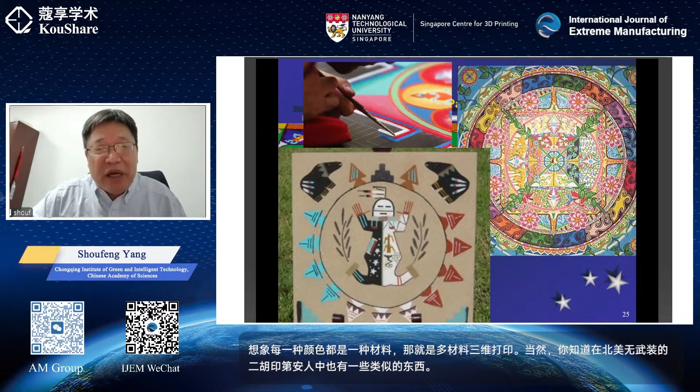I was interested in how they do that, what kind of tool they used. This is the simple tool they used. I will show you a video of how they do that. Let me see if you can see what happens. Because this work is so complex and takes so much time, it's not very usual to see it.

They use a very simple device called a chak-pur, like a hopper. Basically, when they stop the vibration, the flow of the powder stops. When they start the vibration, the powder starts to flow. It's like a valve to control the flow of powder. You can find a lot of valves to control the flow of gas or the flow of liquid, but you don't see many valves to control powder flow, especially from a small region.

So we can see this again, you know, how to control this smartly. And sure, we are scientists, we are engineers, we can't do this by hand. So I think, you know, how do we do this using computers or using robotics?

So the right side is a simple hopper. I copied their metal hoppers. Actually, it's very simple. It's just a glass tube. I visited the chemical shop, and you know, the glass blowers just find a piece of glass tube, then blow it, then draw it, then cut in the middle. They form a small hopper like that. You can see that the powder is just stuck there.

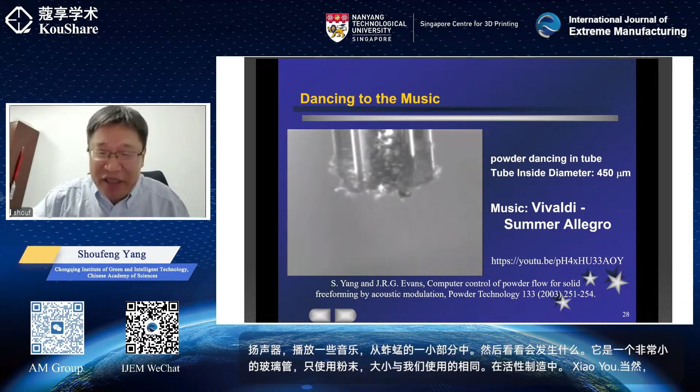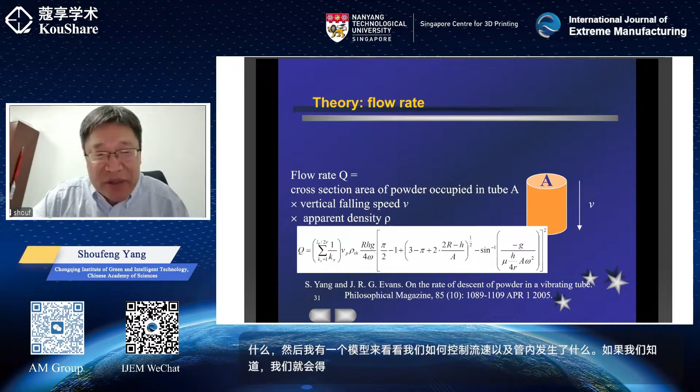Sure, actually, it's not easy to control with music because music has such complex frequency and amplitude. Just for demonstration. In real time, we just use a single frequency and a single amplitude, but we change the frequency to see what we can control. Then there was a model to see how we control this flow rate and what happened inside the tube, inside this hopper. And we get the equation. If we know the frequency, if we know the particle size, we can predict the flow rate.

And if we can have a lot of different tubes, each controlled at a different flow rate, different frequency, different amplitude, we can have an orchestra all playing different music. We can even mix all these different powders together.

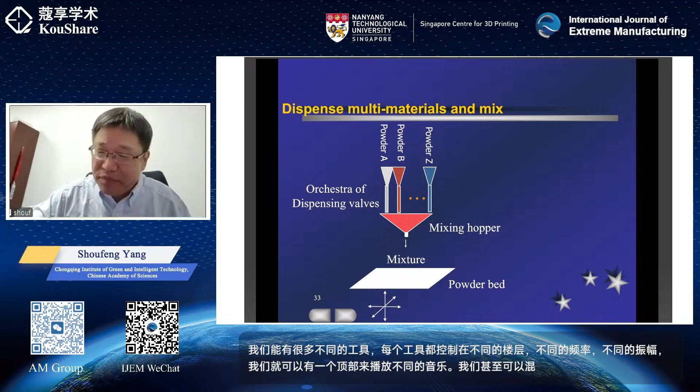And at the first time, the control was not very ideal. You can see I can still control the start and the stop, but if you look closely, you see some match heads at each dot, and also the resolution is poor, typically millimeter-size resolution. But I still managed to deposit a mixture of different materials like copper and steel by online mixing.

And actually, at that time, we even struggled with the laser. At that time, the laser was so expensive. There was no fiber laser, just a YAG laser. And I thought, we can't afford the laser, so can we do something without a laser? We can deposit different materials, so why can't we deposit build materials or part materials and also mold materials layer by layer?

So here is an example. We deposit stainless steel, which is the white part here, and also some black part with graphite powder. We deposit them together, layer by layer in a crucible. Then after that, we put it in a furnace, and we got some nice parts. Well, not quite that nice actually at that time, but we still struggled to get some three-dimensional parts. And sure, there's some problem with this interface, and we built some staircase.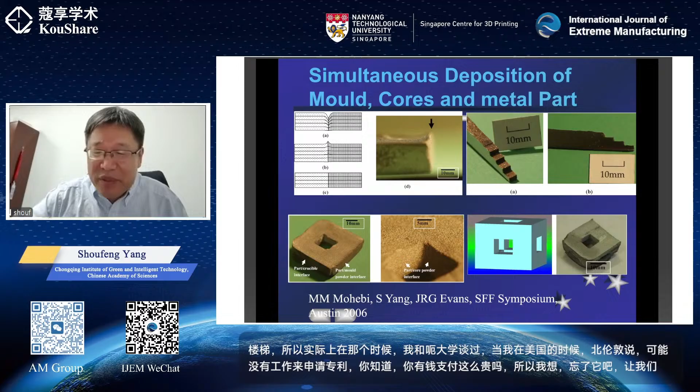And so actually at that time I talked to the university when I was at Queen Mary University, London. I said, oh, probably it's worth patenting that. He said, oh, do you have money to patent that? It's so expensive. So I thought, oh, forget about it. Let's just publish it. And recently, some companies have actually commercialized similar technology.

And I realized that the resolution is a big problem. If we can't get higher and higher resolution, the cross-contamination won't let this technology go further. Because at the beginning, I used a pretty low frequency of sound, you see the scattering of these materials when you have a pretty strong vibration. Then I realized, using ultrasound, you can use a much higher frequency but pretty low amplitude. Then you can control the resolution. At the time we could get below a few hundred micrometers of resolution.

And we can also dispense materials dot by dot. So like inkjet printing, we know that currently most inkjet printing is drop on demand. We are talking about drop on demand. If we need that material, we just dispense it. If we don't need it, we stop.

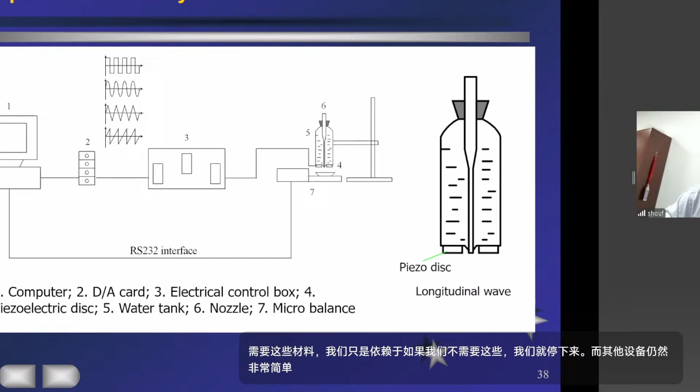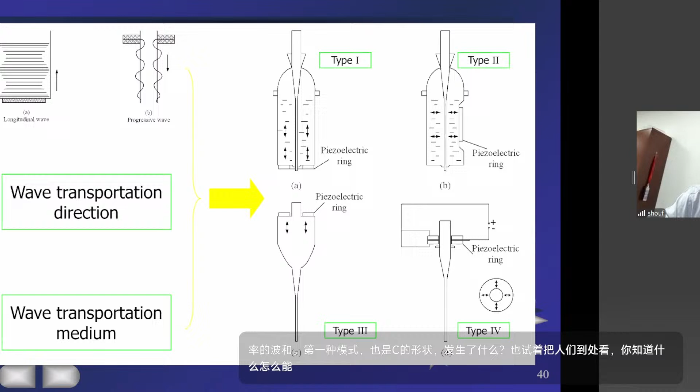And the device is very simple, still the glass capillary, glass hopper with some piezo, and try to use different frequency of the wave and burst mode, and also shape to see what happened, and also try to put the piezo everywhere to see how we can get better control, and try to find what is the highest resolution without much error. That means every dispensing we got the same dosage, because we can't put a balance inside a printer, right?

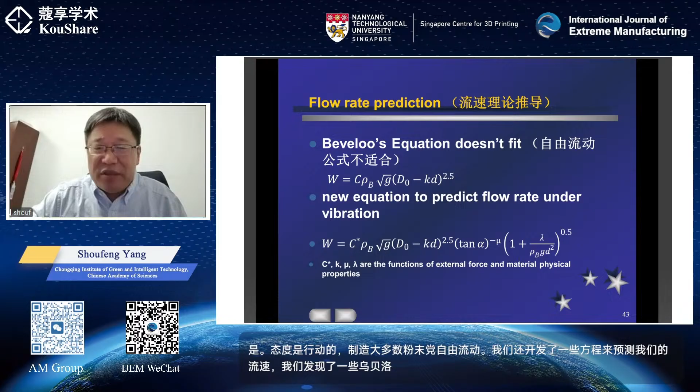We have to rely on this very reliable control, and also try different materials, try all different powders to see, can we do that? And luckily we can do many of them, but if the powder is very cohesive, we still have a challenge. But luckily for additive manufacturing, most powders are quite free-flowing. And we also developed some equation to predict that flow rate, and we found the Beverloo equation doesn't fit for such small scale, and we modified that.

And the repeatability, as I mentioned, is critical. We can get pretty low, probably 1% of the relative standard deviation. That means error could be as low as 1%, with about milligram of dispensing rate, or even microgram, depending on the nozzle size, depending on the particles, depending on the property of the particles as well.

And in the last almost 20 years, I keep improving the resolution or the control of the powder from this device, because I realized that one of the key performance is the resolution. So here, I show the picture of the high resolution we can achieve. We can achieve about 100 micrometer of track width with this dispensing technology, and quite difficult to achieve higher because particle size is pretty big. We are using 50 micrometer of the particle size.

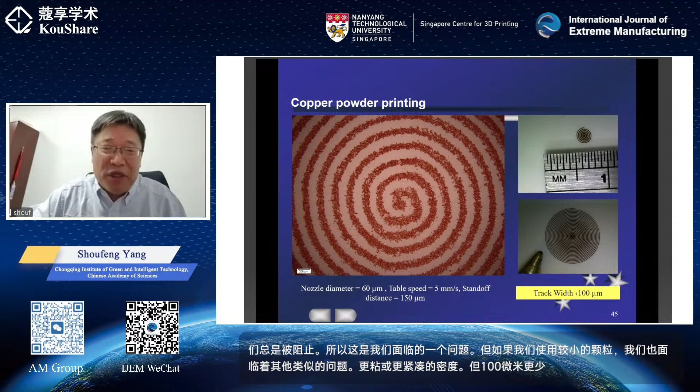This case, we have to use about 10 micrometer of the particles. If you still use smaller nozzles but with big particles, we always got blocked. So that is a problem we are facing. But if we use smaller particles, we are also facing other problems, like it's more sticky or more compact density. But 100 micrometer is more or less enough for powder bed-based additive manufacturing, because we know the spot size of the laser is about 100 micrometer.

And we also try to dispense different materials, try to dispense something like a circuit. Here just a demo, we're using stainless steel, copper, and tungsten carbide, which was 3 different materials for the moulds I mentioned earlier, and also try to do something called structronics. Basically, you combine a structure with electronics inside. Sure, for electronics, you have to use some conductive things, and you can't print the chips. You have to insert them.

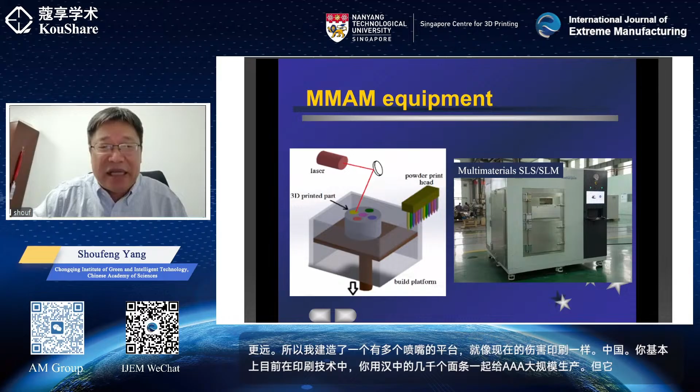And we also try to build the equipment, because without equipment, we can't go further either. So I built a platform with multiple nozzles, like the current inkjet printing technology. Current inkjet printing technology, you use tens of thousands of nozzles together to give mass production. But it's still quite challenging to do this with multiple powders at this stage. But sure, we have to go step by step.

And the interface problem, especially when you're facing a lot of different combinations with many different materials. Not all of the materials like each other. And we have explored quite a few, like copper and steel, copper and nickel, and different titanium, and other things. And I won't have time to report on further details, but probably later, because my team is working a lot in this area as well.

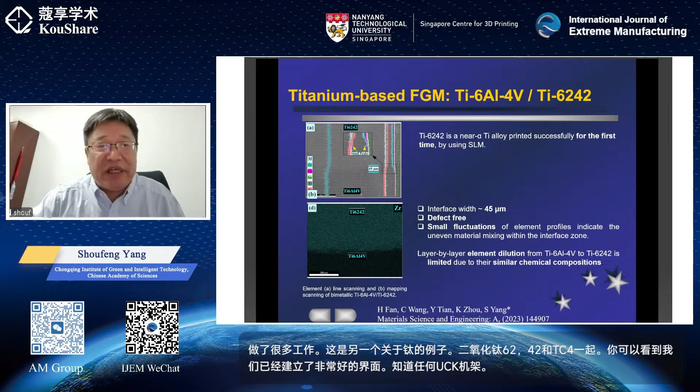Here is another example about titanium. Titanium 6242 and TC4 together. And you can see we have built a very nice interface, no cracks, no defects in the interface. And also we investigate the width of the interface, because the width of the interface is quite important. We don't want a very small, very narrow interface. Otherwise, the thermal expansion rate is quite different, so you can have a very big thermal stress.

Actually, earlier when I looked at all the questions, somebody actually asked this question: how do you control the different thermal expansion rate for different material interfaces? So if you can control the width of this interface, that means you can minimize the stress of the interface.

And we also test different hardness with this nickel alloy, and also the tool steel H13. We can see pretty good interface control. And also, I noticed that Joseph Beaman, who is the inventor of this powder bed-based technology, started to do something about multi-materials as well, in Solid Freeform Fabrication a couple of years ago.

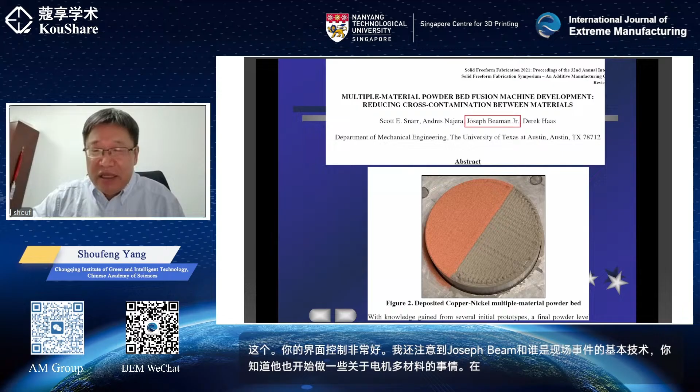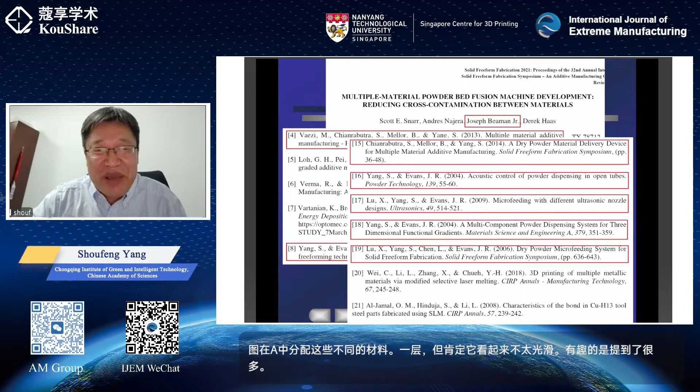He tried to dispense these different materials in one layer, but, sure, it doesn't seem quite smooth. But the interesting thing is he mentioned quite a few publications as references, and 1/3 are from me. Okay, due to the time, I'm going to give you a short summary.

A wide range of dry powders can be dispensed and controlled from different sizes of nozzles, and high precision of dispensing can be achieved, but this is still a small step in multi-materials. Like Professor Milan said, multi-materials, especially in the powder bed, are still at an early stage. We are facing a lot of challenges ahead, and there is still a lot more to do on the material interface. But the good thing is we can control the laser power with different materials. That is the advantage of this powder bed technology.